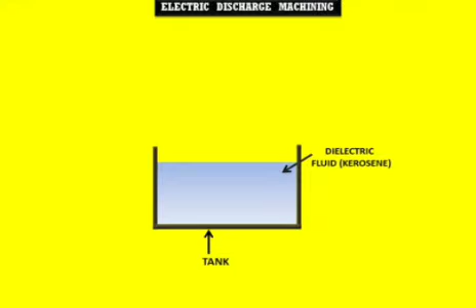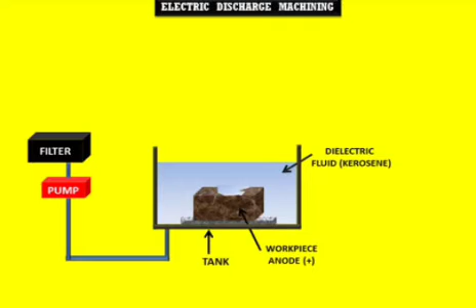This is a fixture on which the workpiece anode is mounted. This is a pipeline that goes towards the pump, and this is a filter that is generally used to remove the debris that remains in the fluid and supply the filtered dielectric fluid to the tank and through the electrode. And this is a flushing nozzle.

This is the graphite or copper electrode, normally negatively charged, the cathode. Metals with high melting point and good electric conductivity are usually chosen as tool material for EDM. So generally graphite is the most common electrode material, since it has fair wear characteristics and is easily machinable, and small flush holes can be drilled into a graphite electrode.

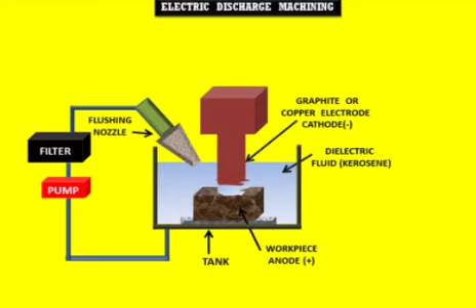And copper has good EDM wear and better conductivity. And copper graphite is good for high machining rate as well as low electrode wear, and it has better electrical conductivity than graphite, while the corner wear is higher. So these are some specifications for choosing the electrode for EDM.

So from here the dielectric is supplied through the electrode from the filter, and this is the feed, generally the tool feed servo control unit. Feed is provided from the servo control unit, which maintains a constant machining gap that ensures the occurrence of the active discharge between two electrodes.

And this is the DC pulse generator. The power supply is responsible for supplying the pulses at a certain voltage, current, on time, and off time, and a series of voltage pulses of magnitude about 20 to 120 volts and frequency on the order of 5 kHz is applied between two electrodes, which are separated by a small gap.

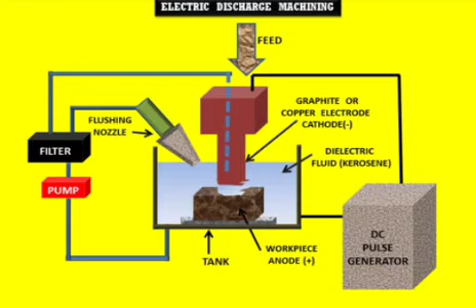Generally here is the small gap between this electrode and this workpiece, approximately 0.01 to 0.5 mm. And when using this DC pulse generator, the voltage pulses are responsible for the material removal, and metal removal takes place as a result of extremely high temperature generated by high intensity discharges that melt and evaporate the two electrodes.

So here we can see these are the sparks that are generated with the help of the DC pulse generator. These are the sparks, and this is the dielectric fluid that is coming out through the pump, then the filter, and through the flushing nozzle.

And flushing of the dielectric, this is the dielectric fluid, plays a major role in maintenance of stable machining and the achievement of close tolerance and high surface quality. And one thing is important here: inadequate flushing of the dielectric results in arcing that decreases the electrode life and increases the production time. So here this is the tool, this is the workpiece, and this is the spark.

And for material removal rate in EDM, metal is removed from both workpiece and tool electrode, and MRR, material removal rate, depends not only on the workpiece material but on the material of the tool electrode and machining variables such as pulse conditions, electrode polarity, and the machining medium. So in this regard, a material of low melting point has a high metal removal rate and hence a rough surface.